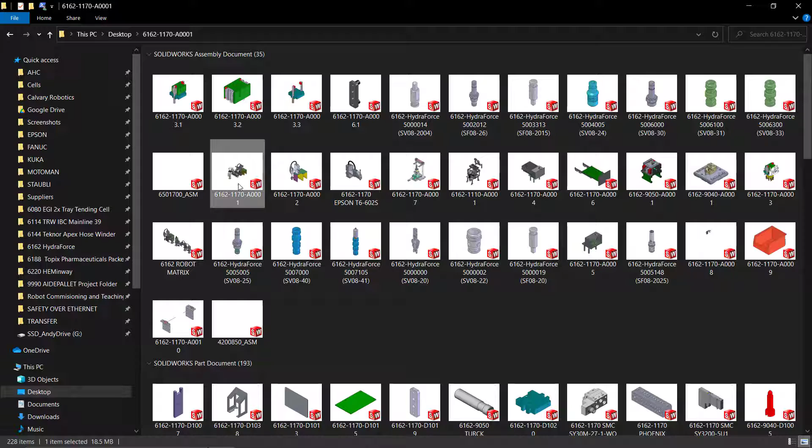Okay, now go to the desktop and open up that drawing. Make sure you open up the assembly. In this case, the whole assembly is this one right here, 001. So I'm going to go ahead and double click on it. All right, cool.

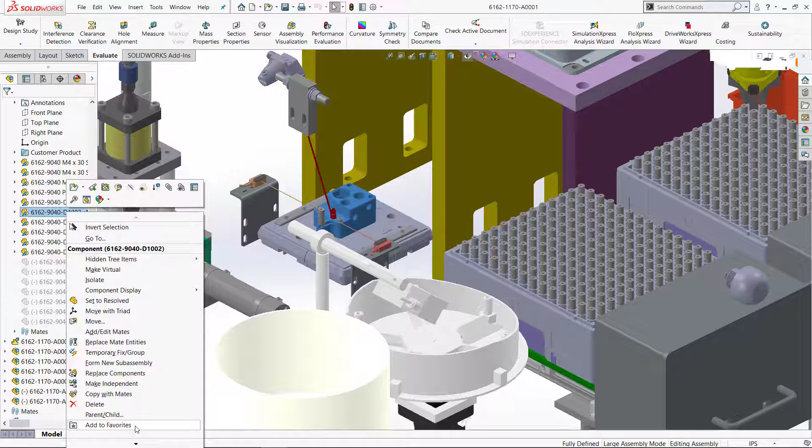Let's go ahead and pick what we are interested to bring into the cell. This baby over here. Let me click on this pallet tool, and I'm going to right click on it, and I'm going to say add to favorite. I also want the pallet, so I'm going to go ahead and click on the pallet and also add it to favorite.

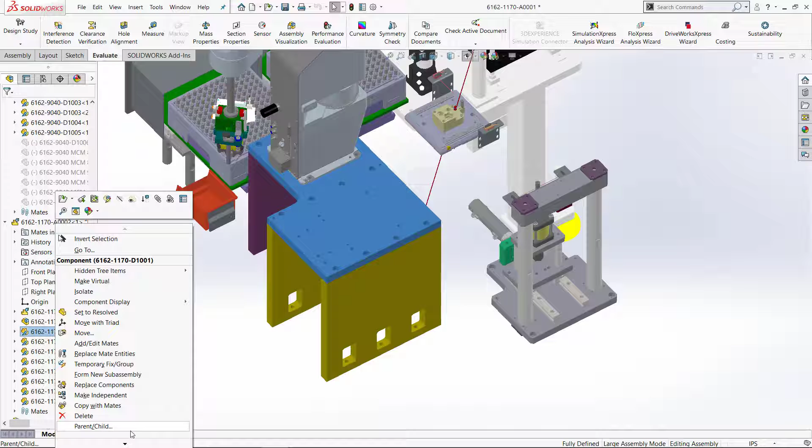The mount, the support, the table where the robot's going to be sitting at, I'm interested in that too. So I'm going to go ahead and right click on it, and just take the top only and send it to add to favorite. What else do I want?

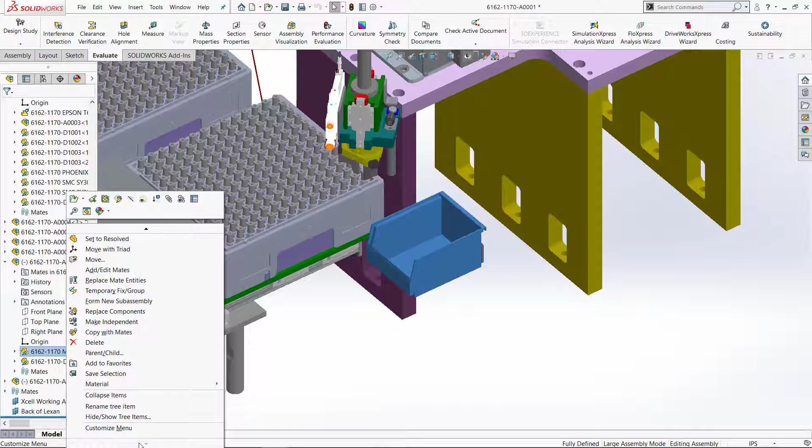Okay, I want also, how about this rigid bin? Let me go ahead and get that rigid bin and send it to, add it to favorite. Again, favorite. This tray, I'm definitely interested in that tray.

So I'm gonna go ahead and right click on it, add to favorite. And also the second one, the other one, I'm interested on that one too. Right click on it, add to favorite.

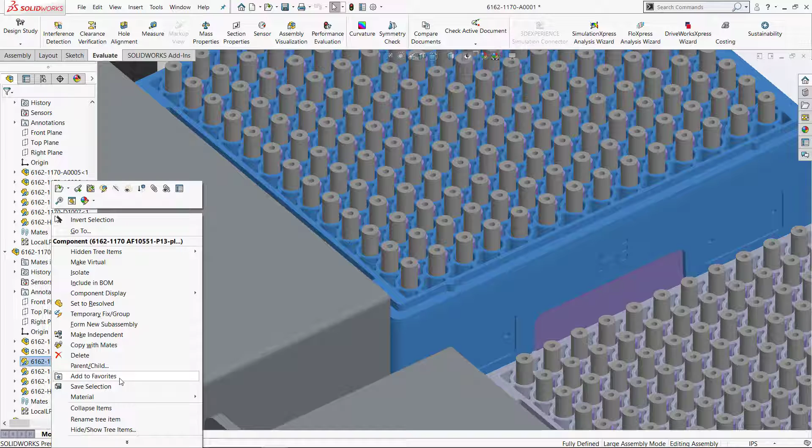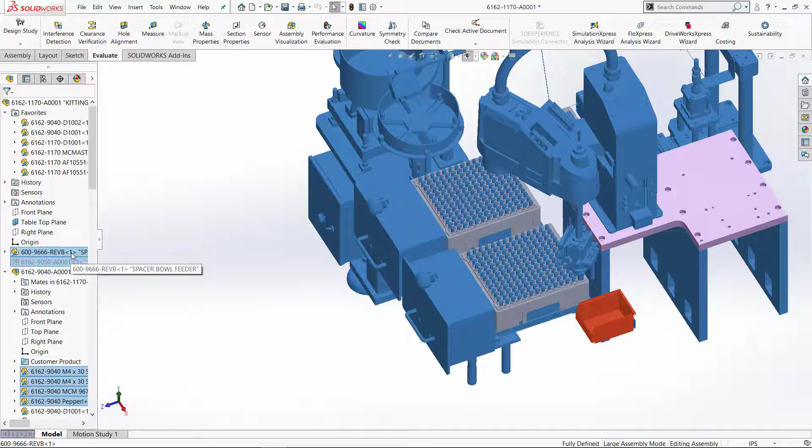That's it. Once I have everything that I need to bring into my cell, I'm going to go ahead and open the favorite folder, right click on all of them, and then choose invert selection. Once I got everything that I don't want already selected, I'm going to right click on it and choose hide components. Good, that's it. This is all I want.

This is all I'm going to bring to Fanuc or to Epson. I'm done already, so I'm going to go ahead and save as, and save it to a format that my CAD robot program would accept. In the case of Epson, that will be step AP203. I'm going to go save that to my desktop.

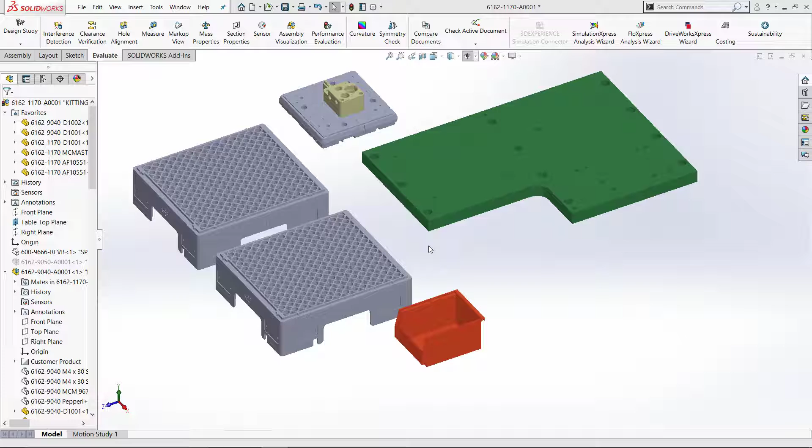In the case of Fanuc, that will be IGS. Once I do that, you see you get a spinning wheel, and it's going to ask you if you want to take care of all the other drawings that we already suppressed or hidden. So you're going to say, do you want to resolve it? Say no, and that's it. You're done.